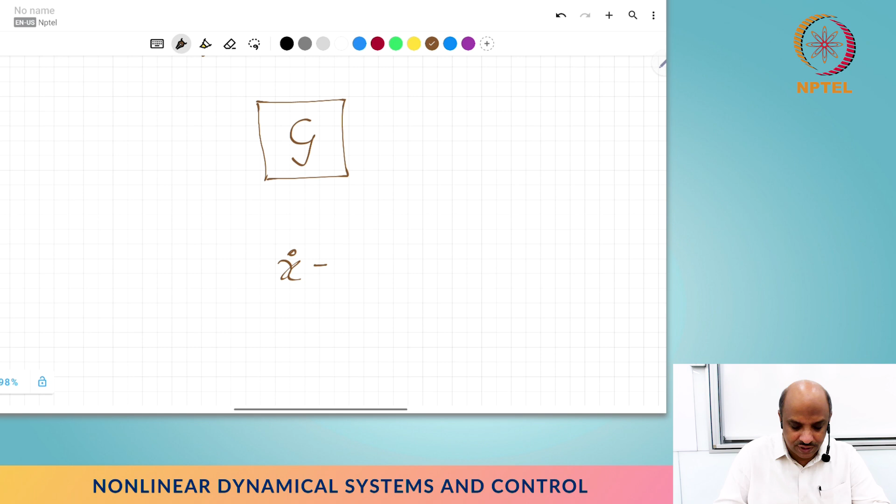Suppose I have a system G. In this course we've pretty much restricted ourselves to systems where we have inputs and outputs. Basically it may look something like this. I'm using different notation, but you understand.

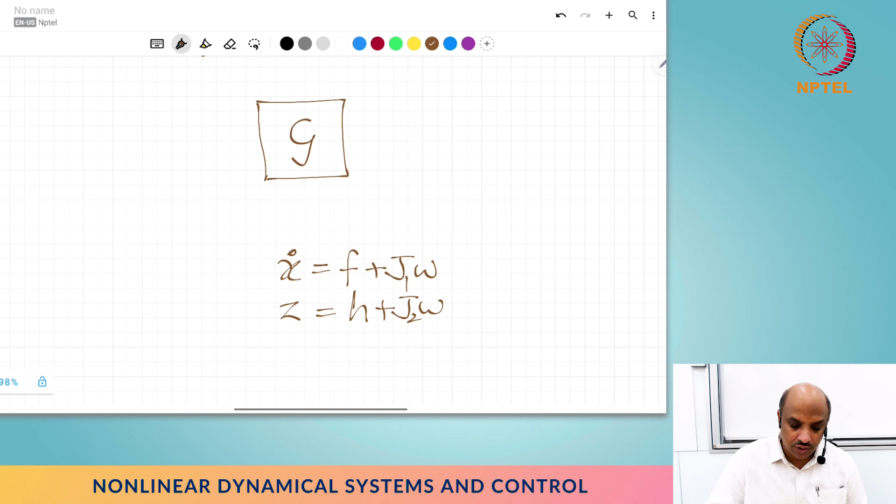We assume G has an underlying model in terms of a differential equation, expressed in terms of this thing called state, along with an external input—in many cases this could be control—and some measurable output or performance output.

In controls, we distinguish the measurable output from the performance output. Performance output is the one we want to control, whereas measurable output is something we have access to, which can be used to estimate the rest of the state and so on.

But if we didn't have this kind of model, what can we say? This model is for our understanding, but if we didn't have anything, we'd have to live with this approach: Z equals some operator on W, and this operator could be defined through a differential equation or something else. The only thing we're worried about is whether this is a discrete or continuous problem from a time perspective, and we deal with it accordingly.

If you think about it, one possible wish we could have for a system like this is: if W is, in quotes, 'bounded,' what can we say about Z? That's a generic question we could ask.

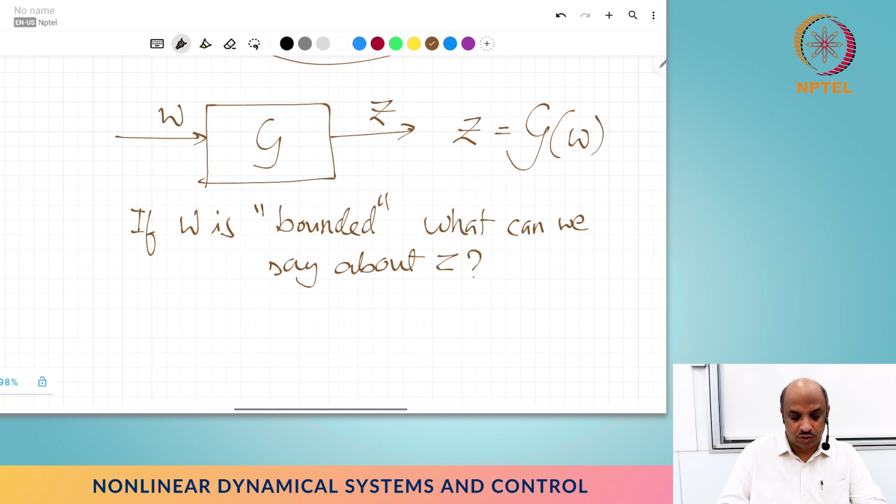So what do we expect? Of course, the disturbance coming from the road profile—the bad profile—onto the car should not affect as much how the passenger experiences vibration and so on. That vibration suppression is a realistic problem whether we have an ordinary differential equation model or not. In that sense, this is as fundamental as possible, and this brings us to the concept of bounded input, bounded output stability.

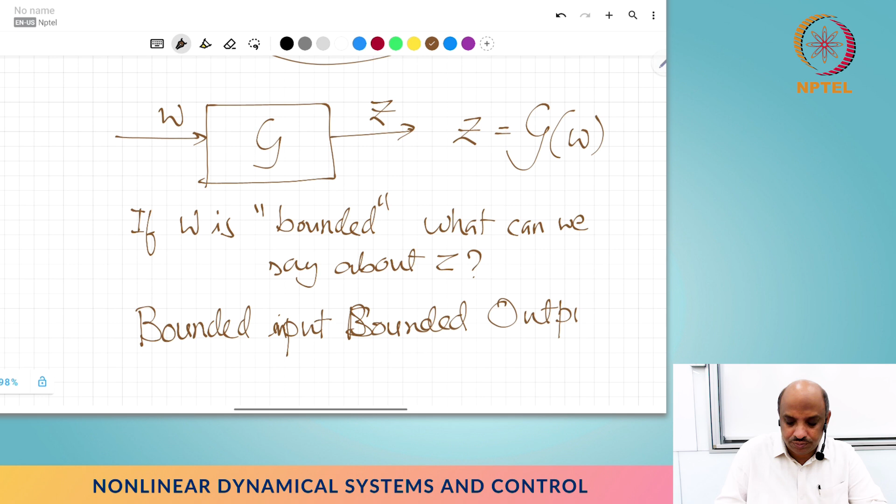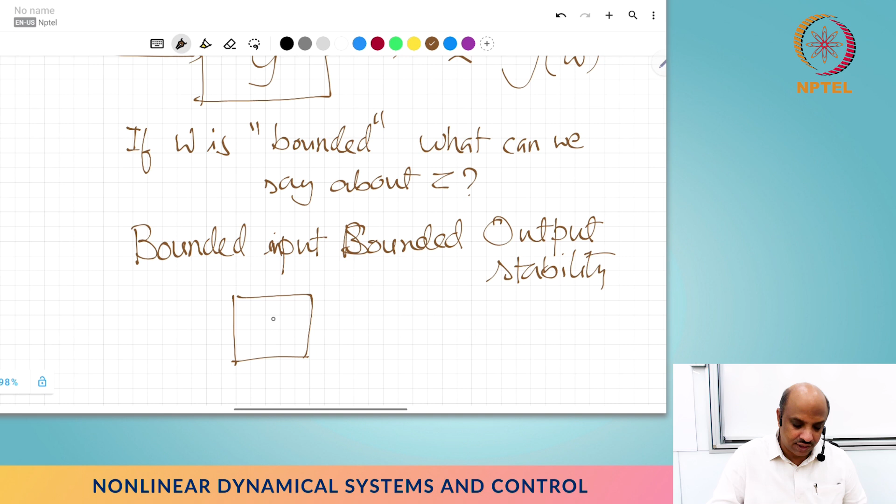There are multiple ways of defining this, right? Even in classical control, in fact, that's how they started. The bounded input, bounded output stability is basically, in the classical case, if you have a transfer function, let's say G of S.

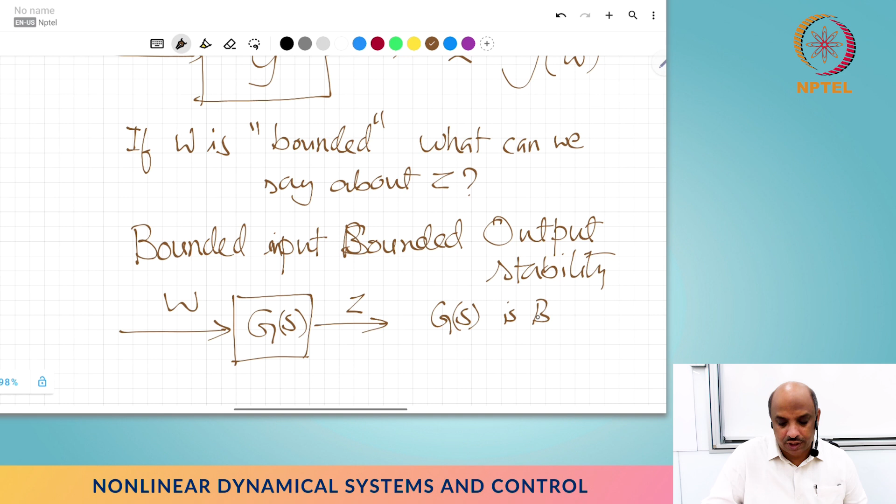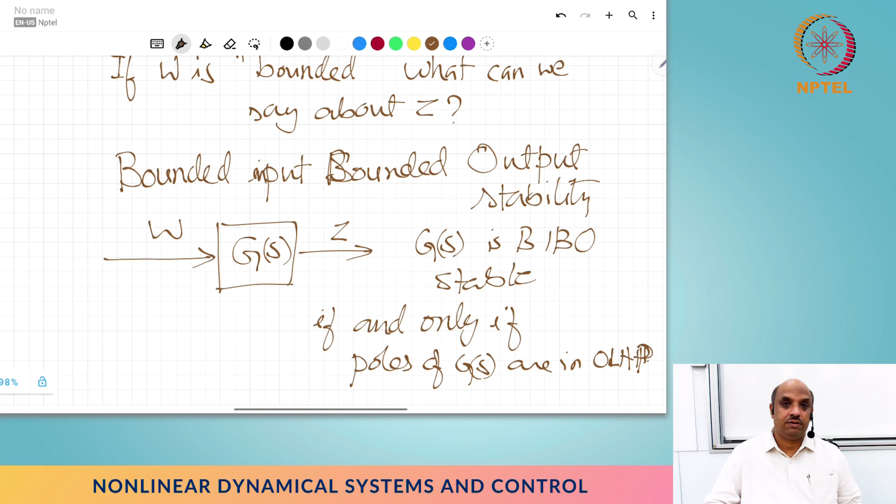G of S is BIBO stable if and only if the poles of G of S are in the open left half plane. So this is a classical result, nice to know.

And what's interesting is that G of S has a state space model, and depending on the order of the denominator of the transfer function, we get the order of the A matrix. X dot equals AX plus BU, and A is Hurwitz, which is what we've been using, if and only if this is BIBO stable. So that's excellent - that's why we could ignore the difference between the state space model and this BIBO stability.

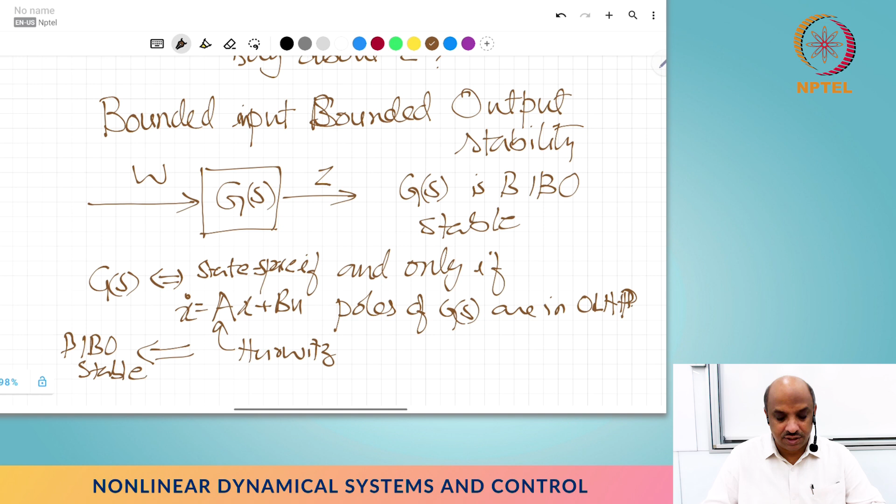Now unfortunately, nonlinear systems are not that simple. But some kind of relation is certainly true - one can actually show that if the state space system happens to be stable, then it's somehow bounded input, bounded output stable. Not quite, but that's what we are trying to achieve.

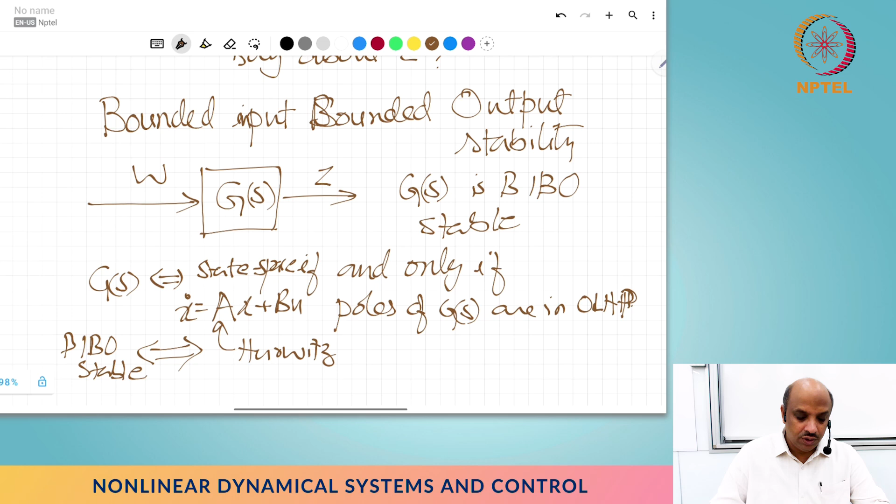So what do we mean by bounded input, bounded output stability, specifically from the notion of bounded input, bounded output? For the time being, we are dealing with continuous functions. Let's say for simplicity we could assume W is a scalar - you can imagine how to generalize that.

One simple way of determining the size of this particular thing, so that we can talk about the boundedness of that, is basically to define some norm over it. There is a very strict notion of norm in mathematics, and we can restrict ourselves to that. So one standard thing people use is the so-called L2 norm.

It's basically take the square integral from 0 to infinity and then take the square root of that. Obviously, only those functions that have a finite number for this particular quantity are what we call systems or signals with that thing bounded.

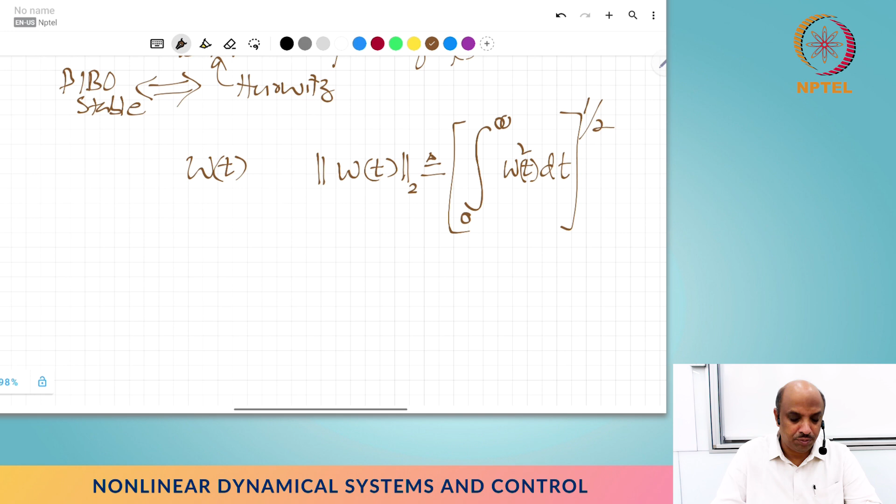In the finite dimensional case, that is simple vectors, no matter what kind of norm you define, if it is bounded in one norm, it's going to be bounded in the other norm - this is the so-called equivalency relationship between various norms. Unfortunately that's not the case in these infinite dimensional cases, that is signals or functions and things like that.

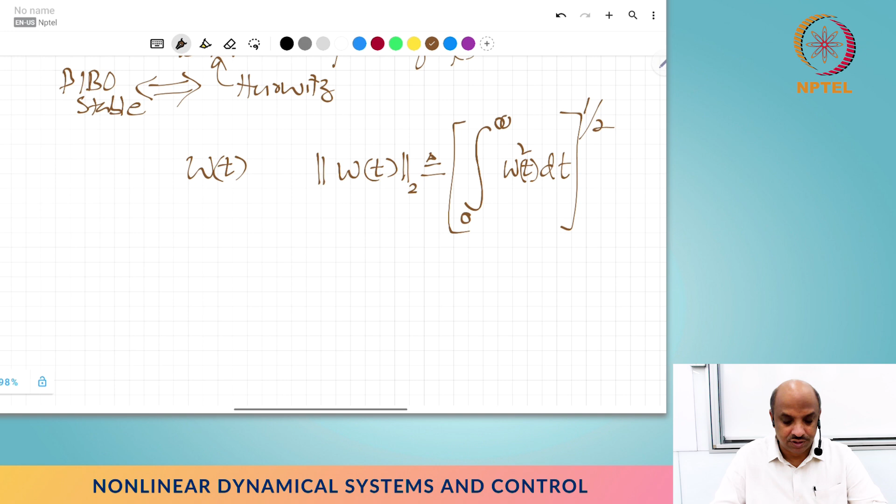What are the other possibilities of norm? Well, of course, people typically associate this with energy. Square is typically like half mv squared kind of a thing - basically we think of this as some kind of energy and then take the square root of that. But in reality, many times we may actually want to discuss the case where we have something as simple as this.

Just take the maximum value of W, the absolute value of W, over all the time that is possible. So we could call this bounded input, bounded output. Like I said, nobody says that this is better than the other one - different applications perhaps demand one or the other. Mathematically, one is easier to deal with and the other one is more difficult, and in fact this is more practical - this is tractable.

And of course one can actually define all kinds of norms. Suppose if you had something like the one norm, that's defined as the integral from 0 to infinity of the absolute value. And you can define somewhere in between with some p between 1 and infinity, and even more general - that's how one can define what we mean by bounded.

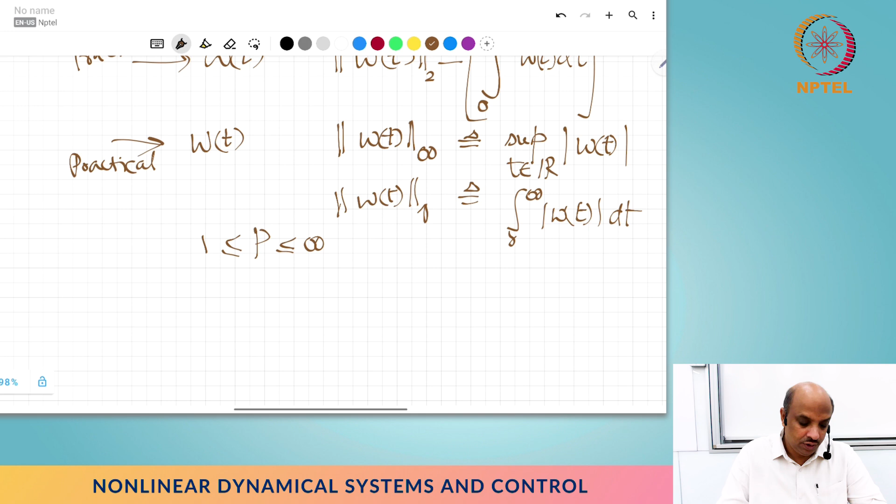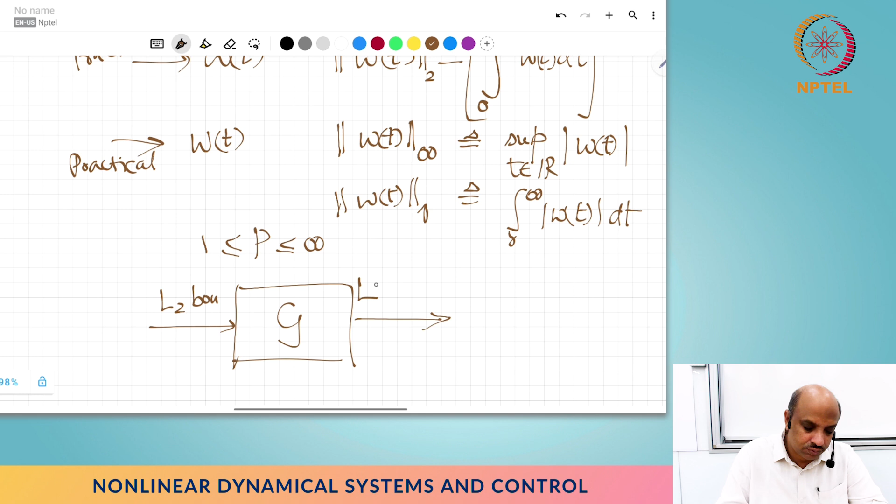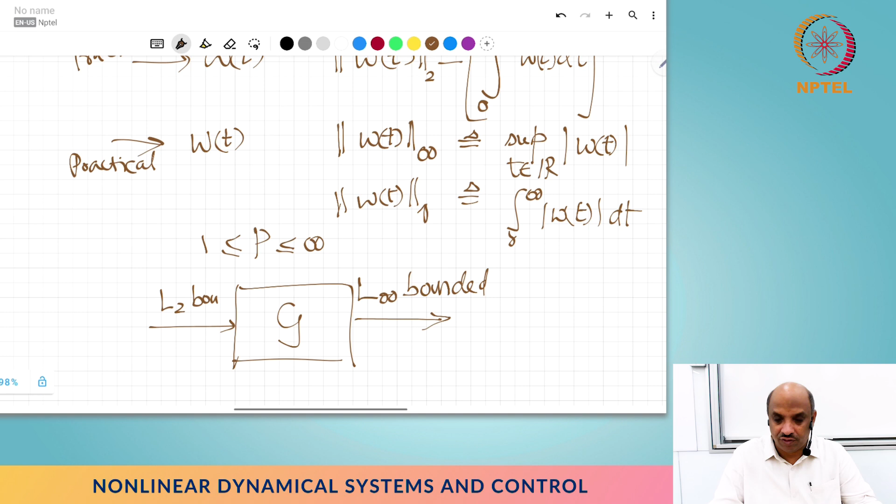If the input is bounded, can we define the output to be bounded? Sometimes we may wish to have the output also defined with respect to different norms. In other words, the BIBO stability could be, suppose, L2 bounded for the input, but L infinity bounded for the output. So if I perturb the system with all L2 bounded signals, can I ensure that the output is L infinity bounded? That's the problem we are thinking about, and that may not be impractical - actually this is a fairly good problem.

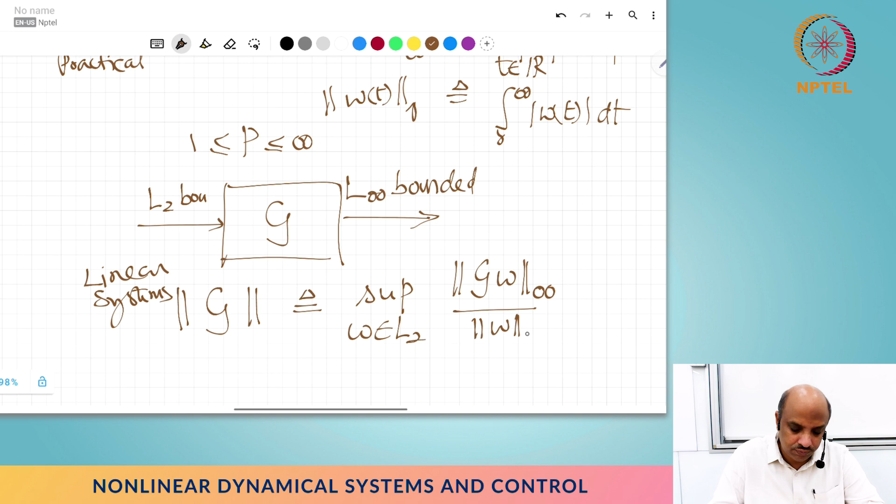In all these things, basically, in the case of linear systems at least, we could define a norm on the system G as something like: take all L2 bounded signals, see the effect of that, which happens to be Z, and then take the infinity norm of that, normalized with the L2 norm. This kind of gives us the amplification factor of this particular system. This is a good way of measuring the goodness of this particular system.

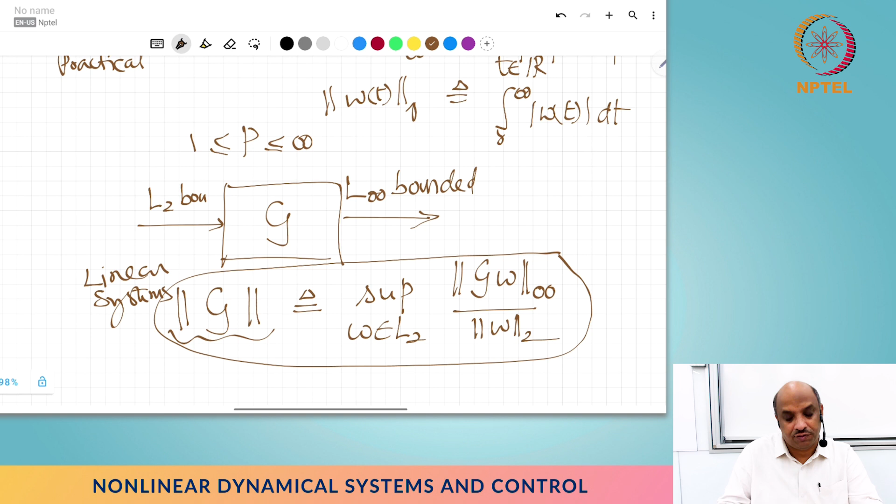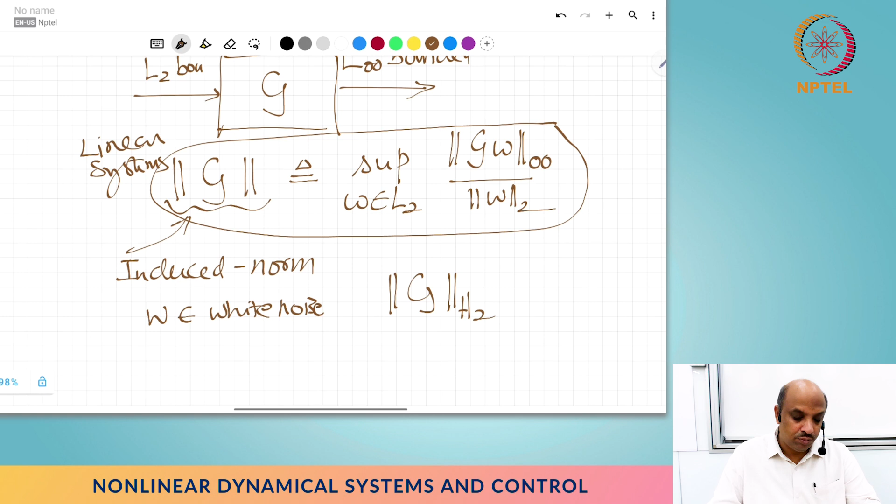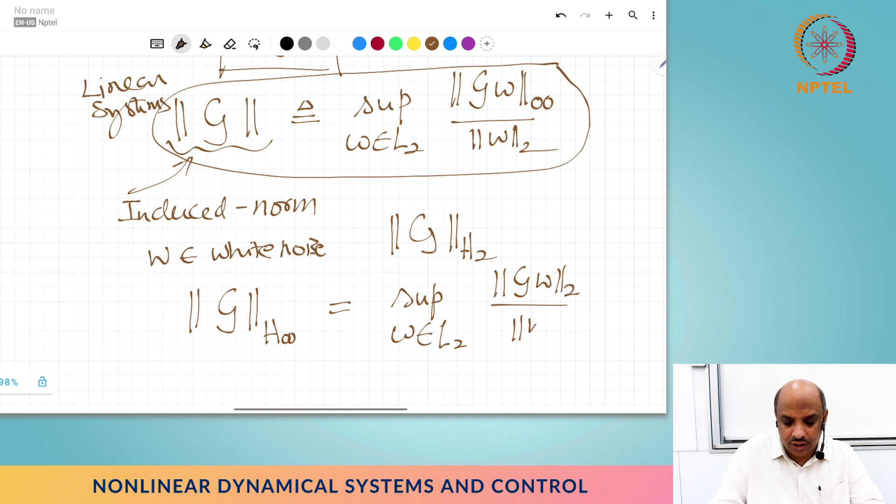This is called the induced norm. So for example, if we had W to be white noise, and W and Z, we can associate some kind of white noise disturbance, and look at some kind of output norm, then basically the so-called H2 norm comes into picture. It's actually a norm on the linear system. But interestingly, the one we will consider in the problem of disturbance rejection is what we call the H infinity norm, which is the induced norm where both input and output are considered to be L2 norms. That's not the most practical problem, but it's the most tractable one.

In the literature, people define something called the L1 norm, in a very special case. It's kind of very difficult to capture the induced norm. What people want to capture is the induced norm between bounded input, and the output also in terms of this L infinity norm, the maximum absolute value over time. So you perturb the system with something bounded just in amplitude, and see how much amplitude results — that's kind of the ideal thing we want to apply when it comes to vibration isolation and stuff like that.

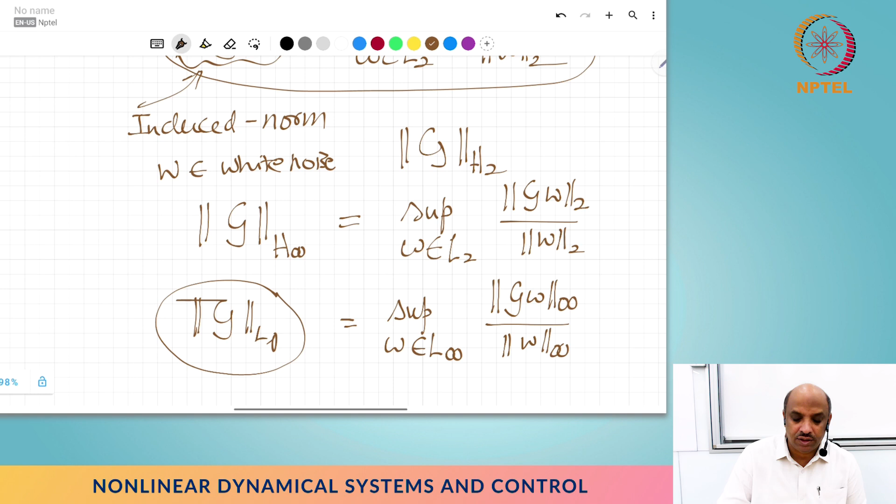In the literature people call it the L1 norm, and in the linear case there are some good results, not perfect — the actual minimization problem becomes quite difficult unless it's a single input single output system. In the case of nonlinear systems, it gets even worse.

So in that sense, the question — I'm going to leave that as it is for the time being. We'll continue to assume this kind of model for our systems. Do we need a state space model to define stability essentially? And when I put state space in quotes, because suppose somebody says it's a transfer function, not state space — but for every transfer function, we have a state space equivalent. So do we actually need some kind of internal model, through a transfer function or otherwise, to define the notion of stability? After all, we define stability as bounded input, bounded output. It's a different thing — for every system that has state space, you can easily go back and define bounded input. In fact, that's what we are going to do now.

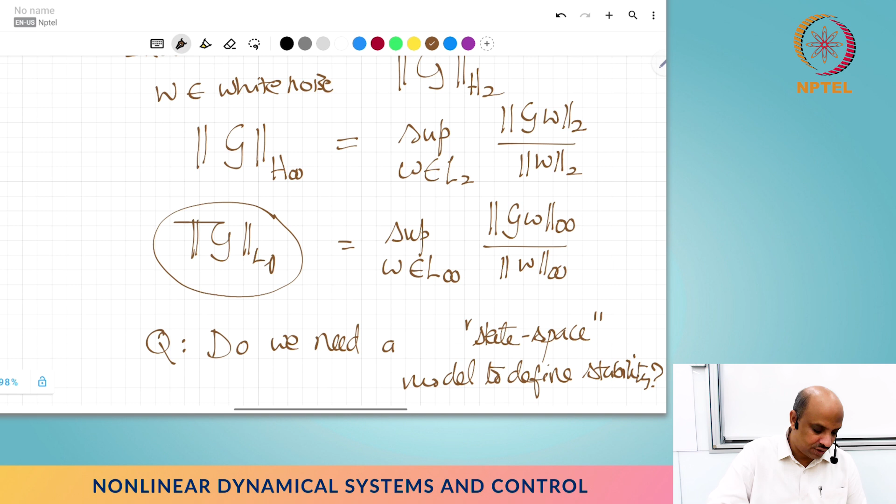So the general question becomes: do we need the concept of state at all to do any of the control problems? Anyway, we'll leave that question as it is and perhaps go back and look at the problem that we are going to solve now.

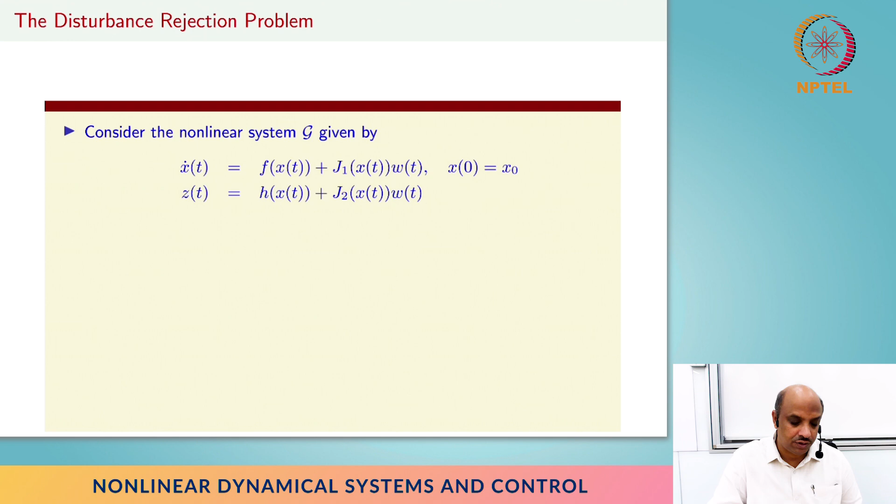We'll come back to the standard model that we've been considering, except we'll introduce some input disturbance, and there is a measurement output which will also have this perturbation of the disturbance. I'm going to assume some kind of norm on this particular input — specifically, that W belongs to that class of signals or functions that has finite L2 norm. The problem here is: can we measure the sensitivity of G with respect to this input disturbance?

Can we verify if this induced norm we just spoke of in the nonlinear case is finite? Unfortunately it is not a norm in the way we define mathematical norms in abstract spaces, but anyway we understand this maximization problem - is it finite? If it is finite, that's good.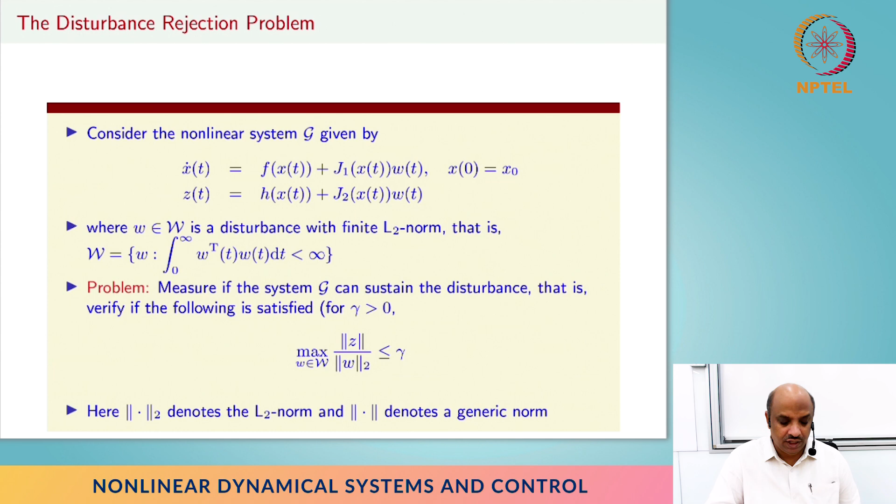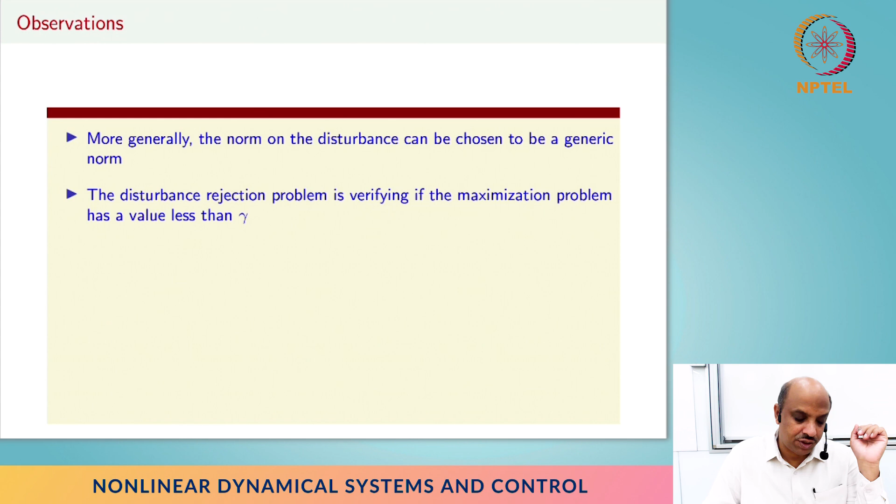Anyway, this norm on Z could be anything, and this is kind of a repetition of what I was just talking about. More generally, the norm could be anything. The disturbance rejection problem is verifying if the maximization problem has some upper bound gamma, and then that gamma can actually be controlled through feedback if we know how to estimate it. Anyway, these are things I already mentioned.

In the linear case, the maximization problem gives the value of the induced norm of the operator mapping W to Z. That operator could be infinite dimensional, in which case you won't have simple differential equations that we deal with - we may have something a little more complex. So in general, it could be a transfer function or a convolution operator.

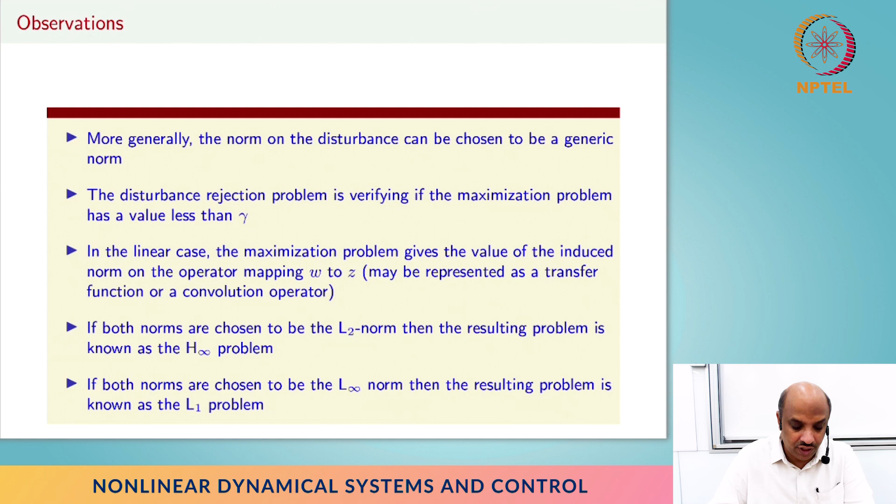If both norms are chosen to be L2 norm, the resulting problem is called the H infinity problem - that's what I already indicated. In fact, the H infinity norm on the transfer function is why it's called that. And if both the input and output norms are chosen to be L infinity, the problem is known as L1. It's the most practical problem, but unfortunately we cannot really solve it.

So here we are going to restrict ourselves to the H infinity disturbance rejection problem. In fact, if you open up any textbook, most of the time they only talk about the H infinity disturbance rejection problem.

How does this work? Well, it's as simple as trying to satisfy this. So what did we say? The ratio of the norm of output divided by the norm of input is less than or equal to gamma, the maximization problem.

So therefore for every W, will this ratio be satisfied? That is kind of equivalent to saying - let me show you what I mean. So we want this less than or equal to gamma. By squaring and then taking it onto both sides, basically we will get this.

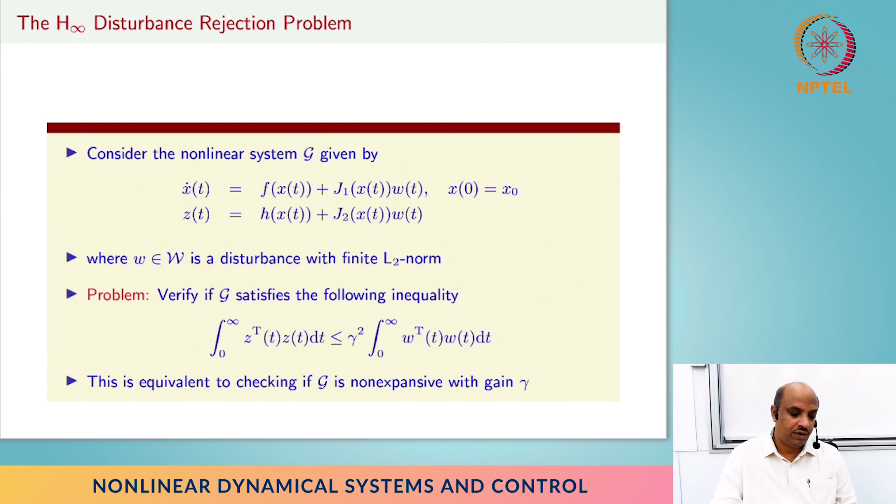So if we satisfy this, then in the linear case that's the same thing as satisfying the H infinity norm on the linear system. And as we know from dissipativity theory that we've seen, this is the same thing as determining if this G is non-expansive with gain gamma. So that's why we can solve this particular problem through the theories we developed.

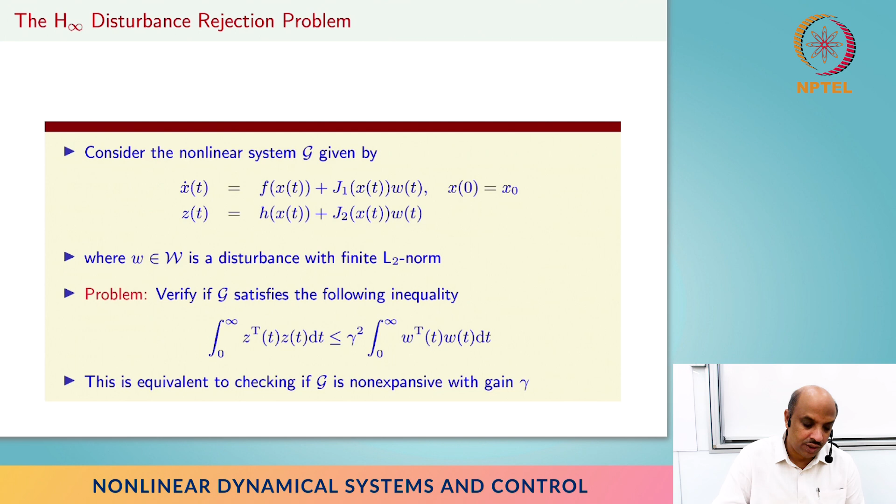So it's as simple as basically saying the H infinity norm problem of linear systems generalizes to non-expansivity in the nonlinear sense. So therefore in that sense, we don't have to really do much. We just have to remind ourselves how one can actually guarantee this constraint we just spoke about. So I'm going to present the result and then convince you that it is indeed valid.

Let's define this gamma to be this interesting function defined in terms of some kind of storage function V. J1 is coming from your system model, H is coming from the system model, J2 is coming from the system model from various places, and basically you define this gamma of x. All we have to do is V prime F, which is the standard V dot we've been talking about, plus H transpose Hx, that's the output function, plus gamma of x, is less than or equal to 0.

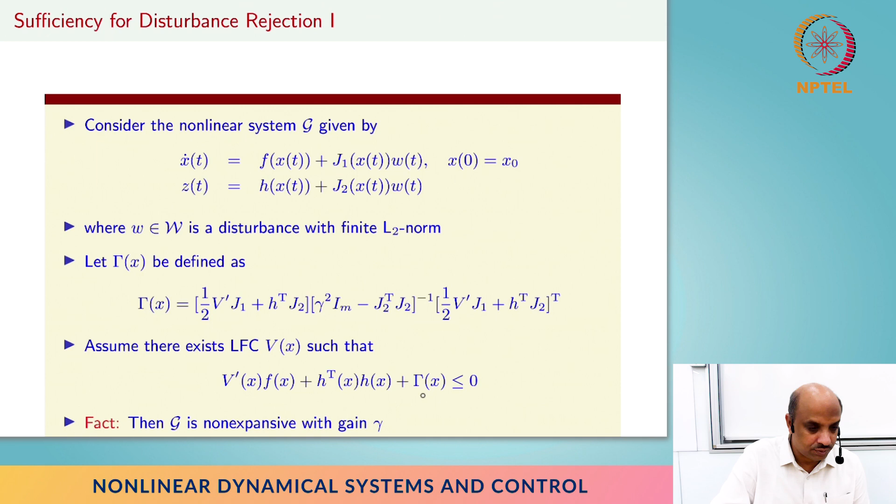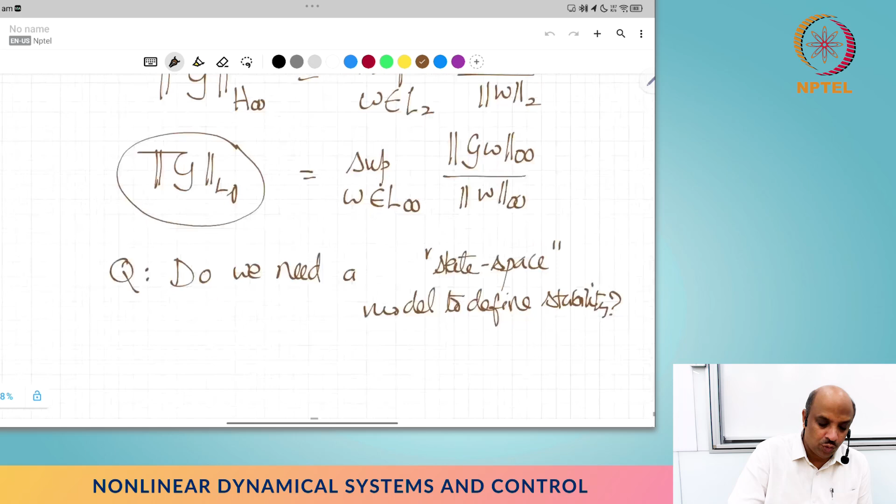If somehow we can convince ourselves there is a V of x that satisfies this particular condition for this particular system, then it is non-expansive. This should not come as a surprise at all - we have seen this kind of thing before when we were discussing non-expansivity in the dissipativity lectures. But I want to show you one more way of deriving this.